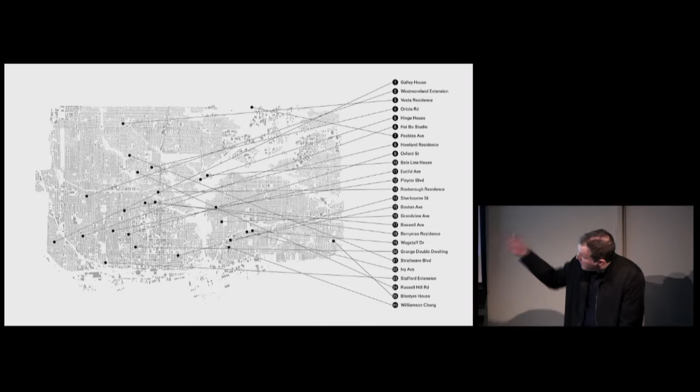Normally we would talk about, even as a kind of new practice, our projects in the city and the role that they play in the city and the role that typology plays in that. But tonight is really about our practice. Of course, I'll be showing work based in Toronto, but it's really about Williamson Chong.

When thinking about our practice, it is impossible not to note those individuals who produce much of the work that comes out of our office. Left to right, we have Eric C., Paul Harrison, Betsy, and myself, Dimitra Papantonis, Chris Routley, and that's Don on the right side. So we are a small practice, a small and productive practice.

I should note that even when I say we're a small practice and that we are emerging, I struggled a bit tonight putting the slides together and thinking about some of the cross relationships between the work, and I ultimately decided that I'm going to present the work at scale, essentially from small to big. For us, big is relative, but there is a future where things will be big.

I'll make some connections between this work, but do understand that as I'm presenting it, it really is moving from the small to the not so small. Most recently, we had an exhibition at the Corking Gallery, and it was the result of about 2 years of travel and research that was funded by the Canada Council for the Professional Prix de Rome.

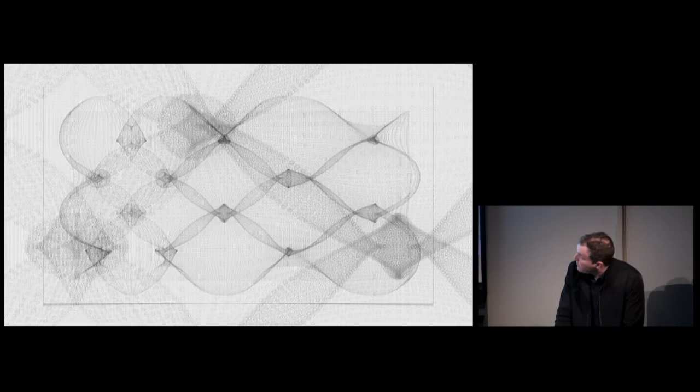In this case, when you see a light circle through this field, somewhere up here is a corresponding dark circle that one could imagine is the bottom of a tree trunk and the top of a tree trunk somewhere up in this field. In each of these images, there is an underlying and sometimes fairly complicated surface, but that surface begins to register the effects of eccentricity alone.

There were a handful of these images generated. Things like this, in terms of this kind of generative mode of thinking, there were about 3 million circles in a drawing like this. It does speak to a greater relationship within the field.

This is actually one of the more recent pieces that we've done. Right with our merger, we were asked to participate in an exhibition at the Workspace Gallery, run by Larry Richards, focused on Chinese embroidery. What's very interesting about this type of embroidery is that it's tremendously sophisticated irrespective of its pictorial representation.

There is a mode of this embroidery where the more sophisticated models represent an image on one side and a secondary image on the back side. The more sophisticated versions don't work from a base template; they're something more like drawing rather than working from a base image.

Looking to exploit this notion of the pictorial, but with an emphasis upon the methodology, the depth of movement of a needle through a screen, we looked at a series of images and applied sometimes a loose logic, sometimes a tighter logic to the extraction of certain elements, let's say RGB values from the image, to create a field. This field condition produces a sense of connectivity, which creates a kind of thickened condition, and this thickened condition early on was something we were interested in.

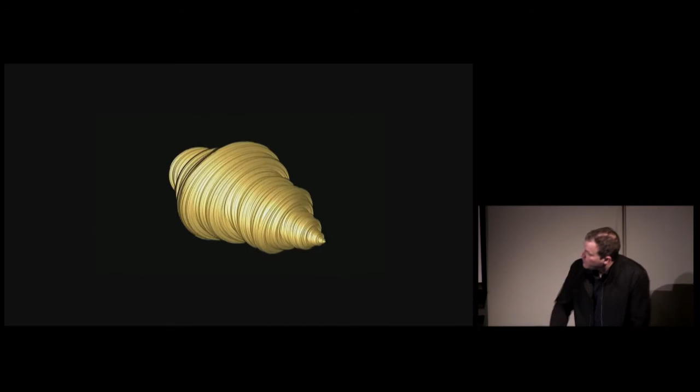What's interesting about this is that we're seeing a ray-traced iteration of geometry. So every instance we're seeing, like this image, doesn't know much about the three-dimensionality of the object other than the image that it's representing.

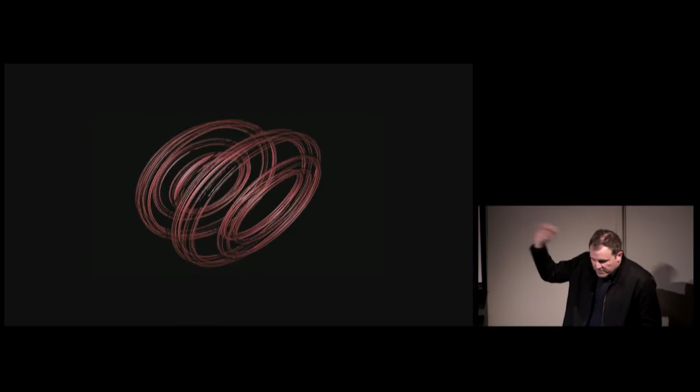What's novel about this approach—and this work was actually done with Alton Byrne, who of course is teaching with us now, was in the office, and this is an aspect of work which we collaborated with Alton—is taking this notion of ray tracing and capturing an image, we were able to take multiple views.

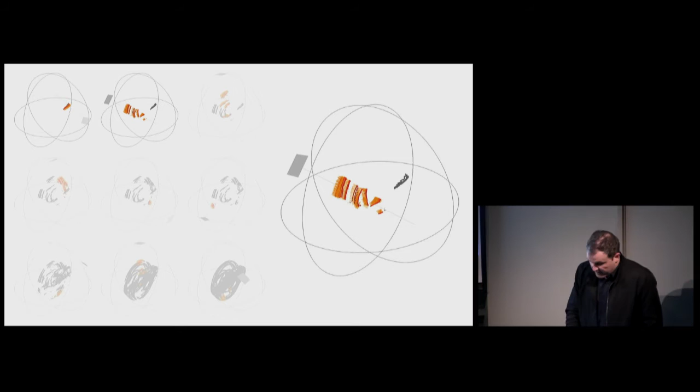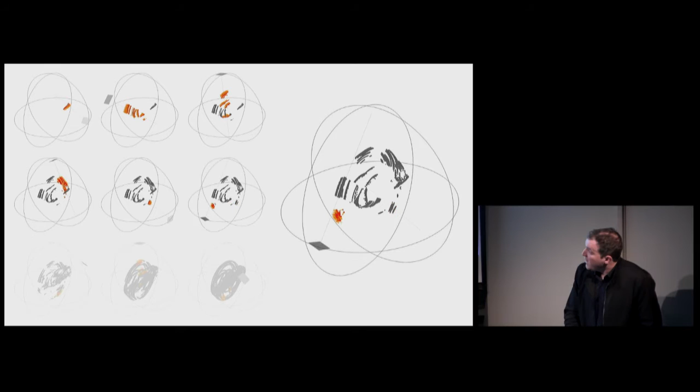The gray square that you see here is the orientation of a single view, and through hundreds of these views, capturing points, essentially the static, two-dimensional image that we associate from ray tracing. Each of these iterations begins to capture a number of points.

These resulted in text files that were gigabytes in size, and produced rather wonderful images of their kind of point cloud configurations. It wasn't so much that we were reacting or changing the geometry of the quaternion Julia fractal, but that we were looking at producing these three-dimensional artifacts, which were quite novel at the time, because again, these things are often only visualized through view-specific modes and ray tracing.

Along with this exhibition, and something that is impossible to show on screen, was a holographic representation of this as well, and the whole language of this was one based on two-dimensional and three-dimensional constructs for the exhibition itself.

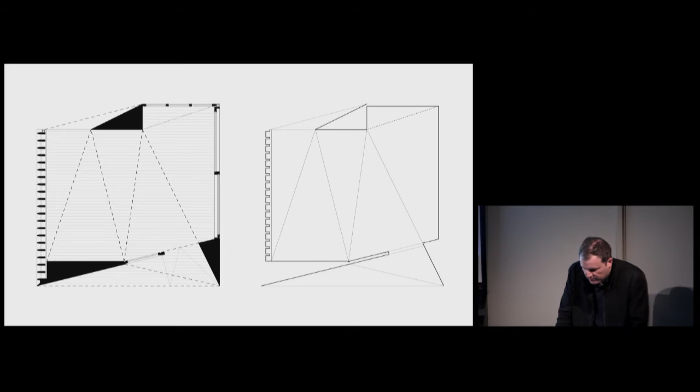Now, as a practice, we separately participated in the interior design show for a number of years, and there's a lot of sweat equity involved in these booths. We did several of the idea spaces separately, as Betsy and I and Don had each done one as well.

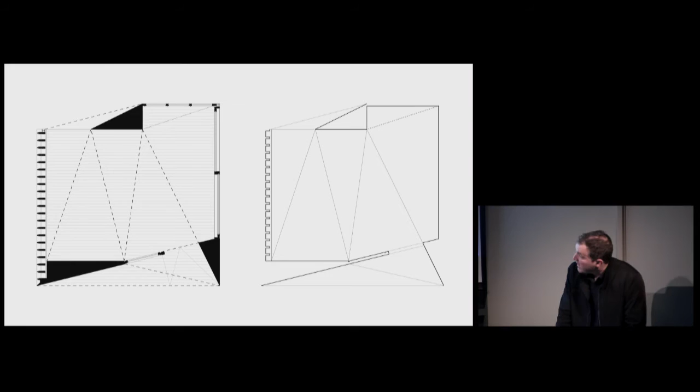We were asked, again early on after our merger, to produce a booth for a line of windows for a window manufacturer. Typically as architects we'd ask, what's the largest size windows you can produce? They supplied those windows, and the geometry of this installation is really the net result of reconciling between all of the maximum geometries of the window systems available from the manufacturer.

So we see a number of views, and you can see the tessellated geometry that results from the varying systems that comprise the envelope.

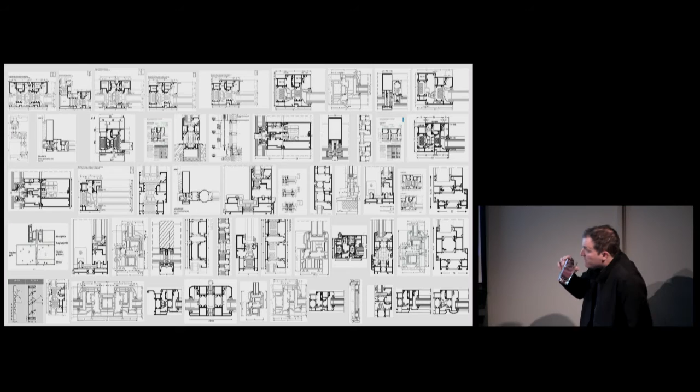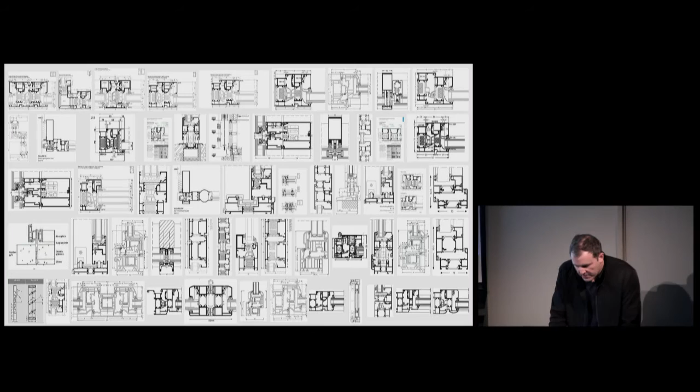Now, in considering things like windows, you're equally invested in the notion of window profiles, and we knew we wanted a smaller installation within the space itself. This is a fairly random set of images, but there was a notion that we would produce a piece that might hang on the wall within the space—an idea of a bear rug that we could make at the time.

What was curious about this was thinking about the hybridization between something like a bear rug and, thinking about the window profiles, investigating something like one of Rorschach's ink blot tests. This notion of psychological profiling, the window profiles, and potentially this idea of the Canadian notion of the bear rug hanging on the wall. If you're not familiar, this was fairly controversial when these ten slides were released, because they're the base slides for the Rorschach tests.

And one of these—I don't believe the one that I selected—deems your compatibility with your mate.

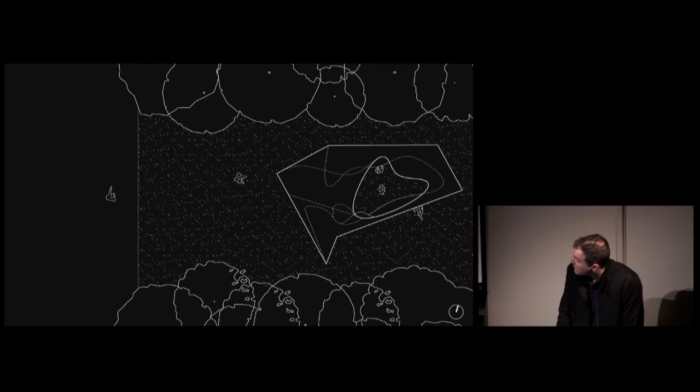The idea for this grotto was that it would produce a space of respite, so we see a view from above and then a view from below, located within a fairly defined parcel of land, populated with a variety of species of moss. On the interior of this geometry, as it relates to the curvature—this is a kind of cut and splayed version of the geometry—the moss would be deployed based on certain light amenities within the space.

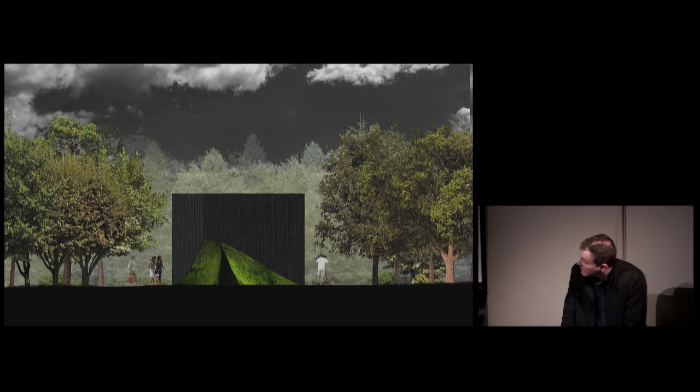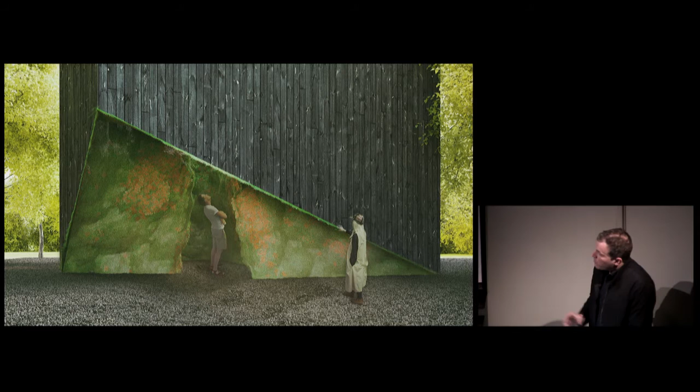So here we see that, in the notion of the grotto within an Italian garden, in front of the artifice of stone, we find a very soft and supple surface within this polygonal box with a view to the top. There's this juxtaposition of the charred wood—essentially the death of cedar, in a way—and the growth of the moss on the interior. And we see the threshold entry into this piece.

Working forward in scale, I'm going to present a typology which we have been interested in for a long time, the dog trot, and I'll show some images of this shortly.

We took an opportunity to participate in a competition in Cape Cod for which we were finalists, giving us a chance to stay within some of the modern houses being renovated. This is the Kugelgips house, and our daughter Ellery looking particularly uninterested in being at this house right now, but I think she did enjoy the trip.

The context of this competition was to produce accessory buildings for people who lived in Cape Cod. The role of these dwellings could be to provide housing for temporary workers, a very seasonal workforce in Cape Cod, but it could also address empty nesters who could move out of their larger houses to live in these accessory buildings and rent out their houses for more income.

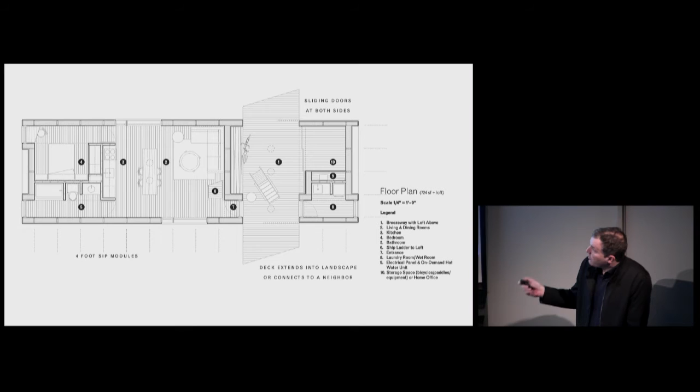We can see the pronounced open breezeway here. One significant thing about this plan is that it sought to use SIP technologies for easy deployment, with an overriding interest in affordability for this accessory housing.

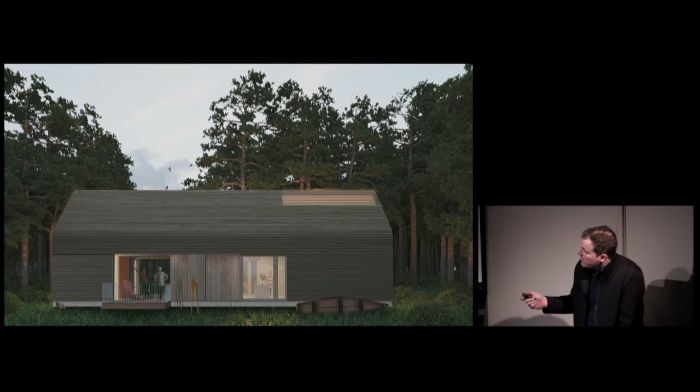Here's a rendering showing the engagement on one of the sites—this is a site for the single deployment of the dog trot. We can see the possibility of a panel that is able to close down the space for greater privacy. The whole system, though not necessarily reflected here since it's clad after the panels go up, is really quite efficient.

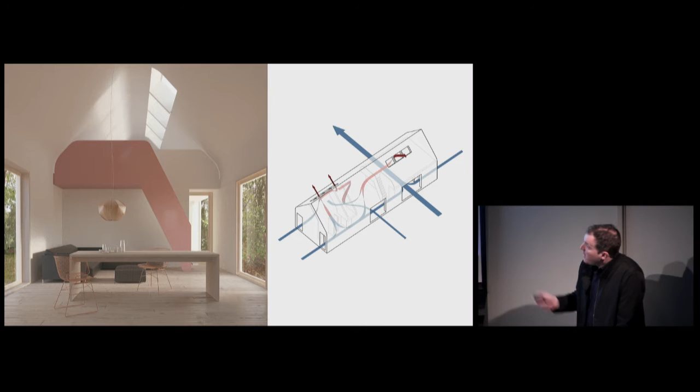In terms of passive strategies, it's really quite strong in the dog trot because of the main breezeway that pulls through. But we are occupying the upper space—in this case, a space that can be for a bedroom or a workspace. There are a number of operable skylights that can pull air through.

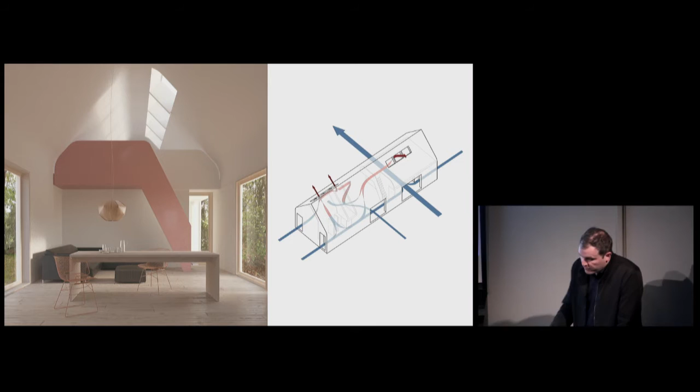So in this case, the proposal operates very closely to an existing typology, and it became very interesting to us with this idea of a variety of scale change, seeing these dog trots set up linear, where the breezeway itself becomes the connective tissue between them—you can see this more clearly in this rendering. This site was truly unspectacular.

So we were looking to create a fairly insular condition and a relationship between these fairly easily deployed houses.

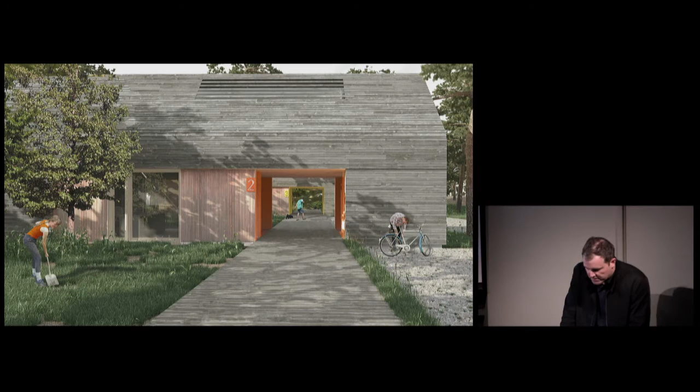One of the projects we have in the office now seeks to play on the notion of the dog trot typology while being a bit more responsive to the idea of landscape. In this case, it's a very direct relationship to the existing contours on a site and the overriding programmatic sensibilities of the client.

In this case, although it's very difficult to read on the screen, you should note that the master suite is on the left-hand side and all of the kids are on the right-hand side for reasons of privacy. There's this idea of taking this linear program and adapting it to the fairly extraordinary topography of this site.

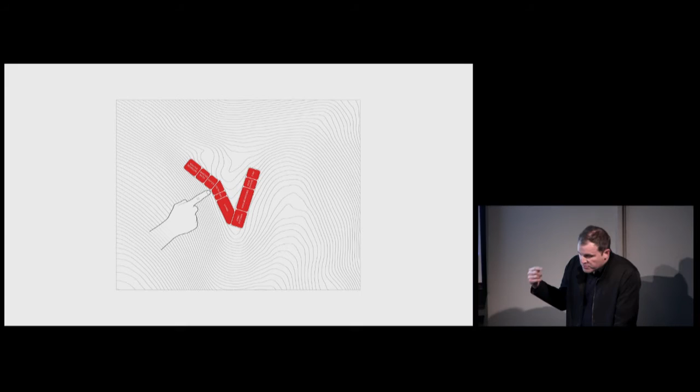Addressing some of the subtle manipulations, and in doing so, allowing a bit of the geometry of a pitched roof typology to play and create a crenellated surface on the outside of the building.

And so we see this is really operating as a guest house on this site. We see the net result of this permutation with the two bars. Now, of course, the left-hand side and the right-hand side are close together, closer than they were in a line. But it's this merger of the two points which produces, in fact, the kitchen and living room right here, and there's a view through this part.

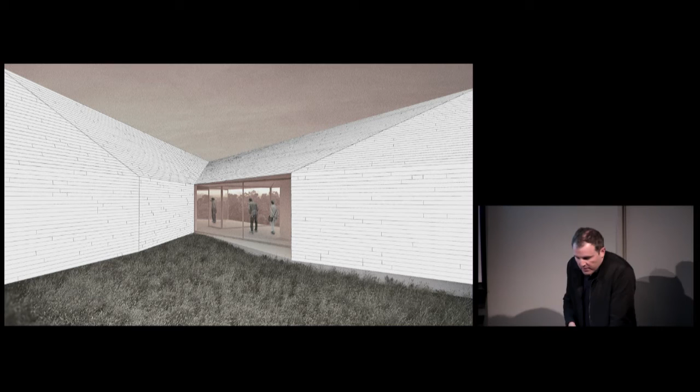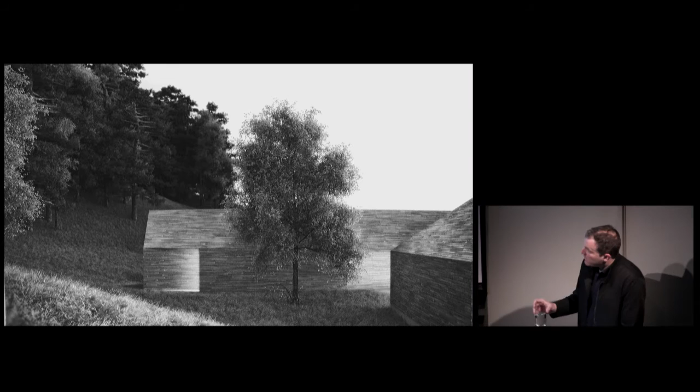We'll see in plan, this is the kitchen and a bit of an outdoor deck. This becomes the more meaningful image with respect to the dog trot typology, where we see a single, not an open breezeway, but a single point of view through an opaque side of the house, which is meant to maintain some privacy for the entry.

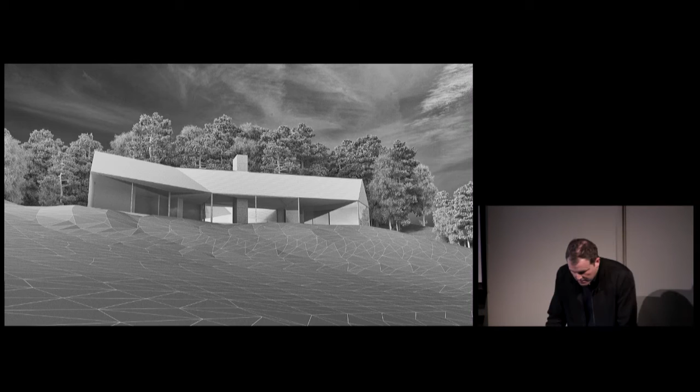But this is located up in the Collingwood area, and the clients were avid cyclists. They have a very intimate relationship with the landscape, and they also had a desire to avoid the view of a neighboring condition. There's a house adjacent on this very big lot that they would rather not see from their new house. And so they had asked us to seek opportunities to engage the building into the landscape.

And so this is perhaps one of the very first schematic renderings that we had proposed to them with respect to this engagement. There's this idea that there would be a lower level which have a view out to the landscape to the right, and that there would be a land bridge of sorts which would connect to a family room and bedrooms on the second level.

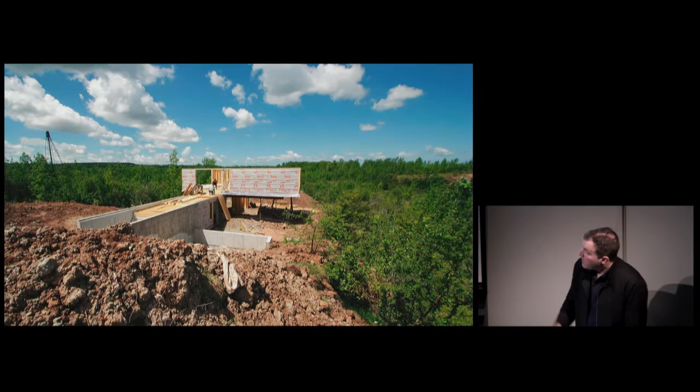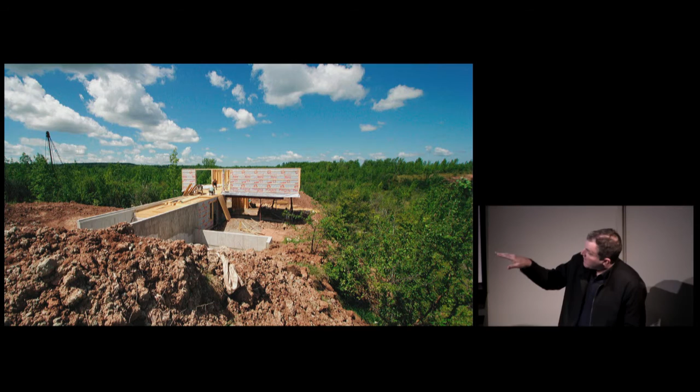And what's surprising from that image is how close over time it remained, even as the project developed. And we see from this side, of course, the engagement from above, and that is more the private side of the house with a view, but the entry condition has this fairly muscular tectonic of this cantilevered concrete wall coming out of a landscape that is largely opaque. There's only a single window for a bedroom on the second floor, but this was meant to provide them a tremendous amount of privacy and protect the room that is beyond.

Essentially, this is the kind of all-purpose room, dining room, living room. It's a very small house with a view from the kitchen looking out to the landscape. And so in the finished iteration, there's this really wonderful relationship that the building has to the landscape that in fact somehow feels very natural right now.

But truthfully, this idea of integrating a building into a landscape has immediate consequences during construction. So we had a very cavalier contractor. One looks and you'll note the absence of shoring on the deep rear side of this. But it's jarring at first when one starts building, unlike the abstraction that we might have in academia when we speak of integration in landscape, when the reality of integration begins with something like this.

And in this case, there was a fairly modest budget, so the way in which we employed details had to be very strategic. And so we're seeing here concrete formwork, the formwork of which is very standard residential formwork, and then there's only moments where there's board form lining the interior of this residential formwork, which is meant to—and you'll see in the subsequent image, you can now see over here the landscape coming down off of that wall—and this boardwork produces a kind of matching pattern to the cedar and the transition to this edge to the back patio.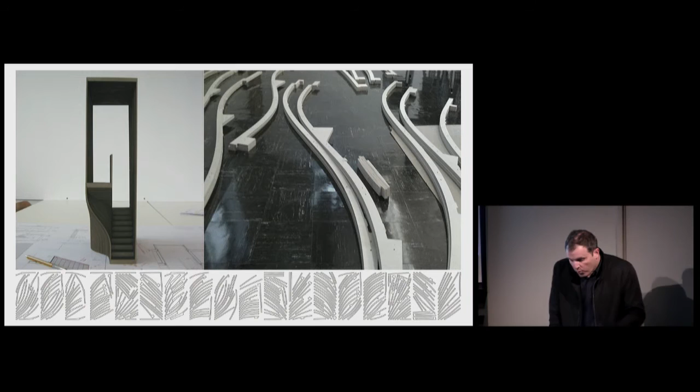The siding was one opportunity in this project, and the other was a stair. The stair operated under the simple premise of cut profiles that encase the underside of a simple switchback stair. This marks an interest we have in deploying such technologies at moments of threshold or points of engagement—the points on projects that we see and touch. This is happening at the entry to the house, and it's something we fabricated and installed ourselves.

It also marks an interest that within much of our work there is a certain restraint in the overall reading of a project, paired with a potentially more exuberant geometric exercise within. There were other moments where we took opportunities within the house to look at the supply conditions for air within the systems.

Whereas that was one of our early projects, a project we're working on now, partially under construction and to be completed once the snow melts, is a project up in Fox Lake. This project looks at the typology of the Korean Hanok. One thing about the Hanok is that in some of its iterations it has a mountain on one side, a river on another, with a north-south orientation—and we're privileged to have that same orientation on our site.

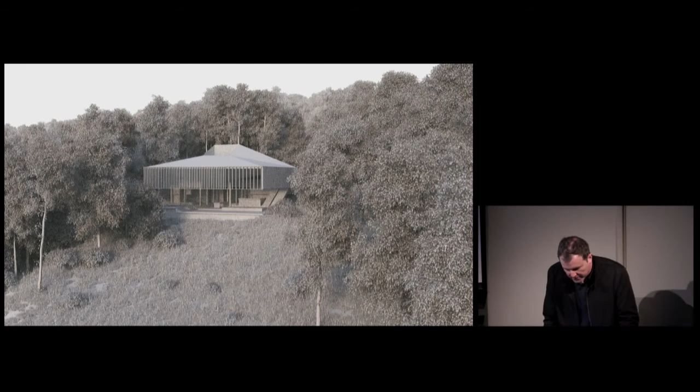In this project, as Richard mentioned, we were fortunate to receive a Canadian Architect Award this year for the house. It's really an extraordinary site that allows us a sectional engagement relating to the inclined topography.

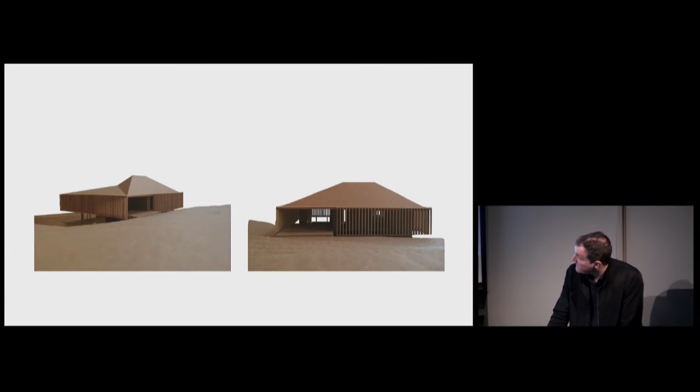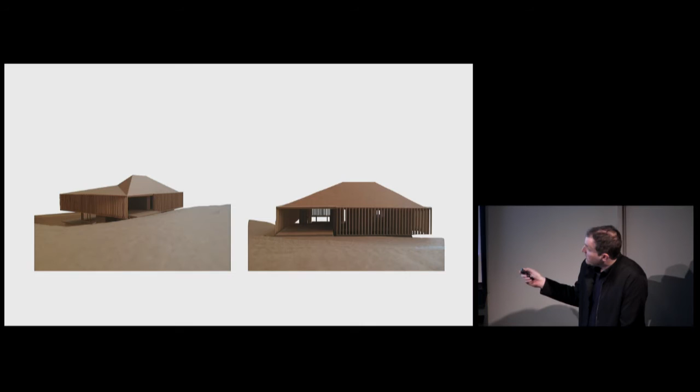Rather than having the inverted roof within, we now see this roof having a more normative pitch in some regard, while feeding the sense of an interior courtyard within the space itself. These are rather crude model photographs, but they show the entry condition from above, which is a very different reading from this side. Essentially we enter in this corner and then descend into the main spaces within the house, with this upper tier—this L-shaped part of the plan—being a master suite.

So this is the upper floor and the entry condition here. This is the master suite.

There's a descension down into the main space here with an opening view to the landscape and this kind of flanking. And then in some regards, there certainly wasn't...

A desire to have an open air courtyard. So in fact, there was a lot of adaptation, but there's a sunken moment within the space with the dining area, which is the receiving portion of the light of the skylight above.

We see a rendering of one of the iterations of the scheme, and a second iteration.

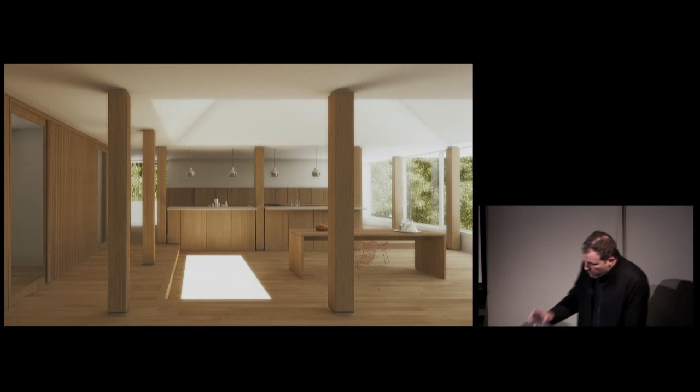Now, there was the house in Frog's Hollow, which for our practice is fairly iconic, and then there is the Galley House. The Galley House was Don's first project, and it marks our move in some ways, and the move in this talk back to the city.

And what's curious about this is that in today's market, someone will look at this house and see tremendous value, a lot of money if someone would pay for this house.

Not so long ago, this was very much a problem. A house like this, for example, for new construction, you have to deal with setbacks. And there was something very radical about this proposition.

And of course, as I'm presenting this, every time I talk about this project, I just imagine Don thinking all the different things he would say about the project, by the way. It's hard for me to kind of get through this, but I'm going to give my own reading of it.

What's extraordinary about this is that the removal of the existing house produces then this new house, which is less than 12 feet wide, and has a kind of extraordinary frontal condition of transparency.

A transparency, of course, which would be that a client would have to be quite amenable to in terms of the openness to the street. But this openness to the street is the thing that I absolutely love about this house, because in fact it's the investment of kind of receding the skylights in the space that produces a backlight condition for the glass.

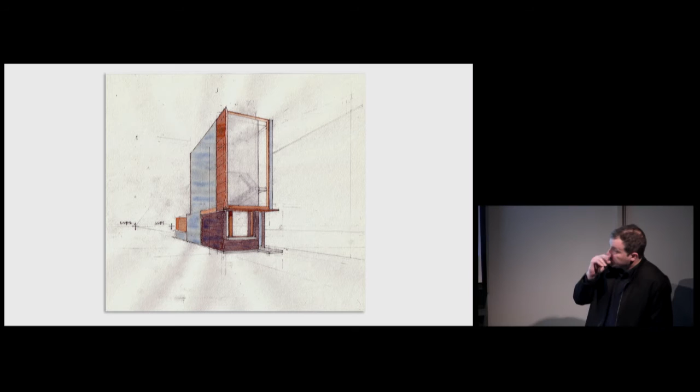Don can draw very well. This is... we are curiously of a bridging generation, I think, Betsy and Don and I, in which we were trained by hand and used computers, which is kind of good because as the partners in a practice, we're not divorced from the tools of which our fabulous employees are slaving away at every day.

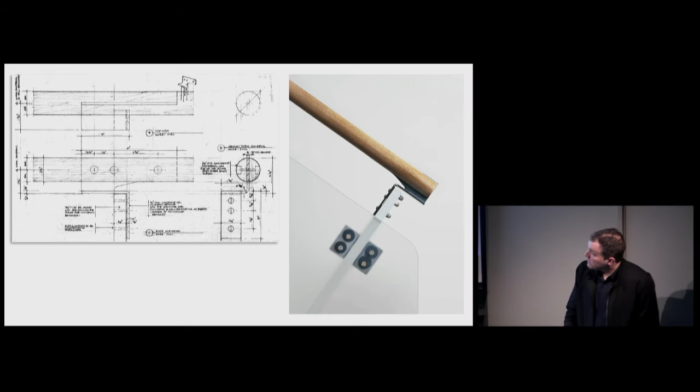And then, the notion of thresholds and handrails in the house, I think, are quite extraordinary. And then the notion of livability.

There's a double height. Interestingly enough, this house is located on a street called Galley Street. It has a galley kitchen, but its title is not related to this. But a very livable space, and a space that...

Established tremendous traction for our practice and for other projects. So as an example, there's this notion that with the galley site, it was an existing narrow condition.

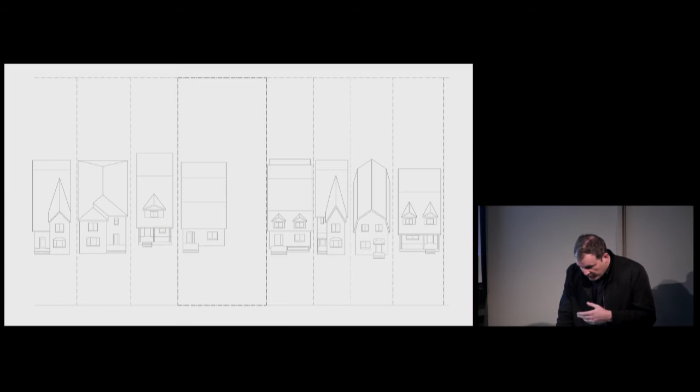So now we see another house, in fact, which has an unusually wide lot. And through some negotiations with the city, there's this idea of splitting the lot, selling the existing house to help fund this house.

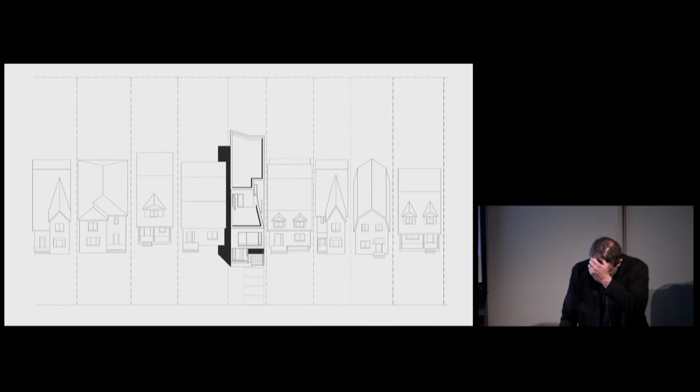And it's curious here because we're manufacturing our own density and a certain belief, and in dealing with this narrow condition, there are a lot of incumbent issues, particularly the idea of getting light into the middle part, the middle aspect of the program, which is a challenge within narrow lots.

And so we see the front elevation here, and I'm going to show a zoning image from the city. I'll make a comment back to this image when I show that image about the similarities.

I'll show you a couple of images, but this house is kind of dealing with a narrow lot, but it also is engaging, I'll say, a certain typology of us having certain walk-up conditions where, in fact, we're not looking to program a house with all of the broader programs, the living room, dining room, and kitchen on the same floor.

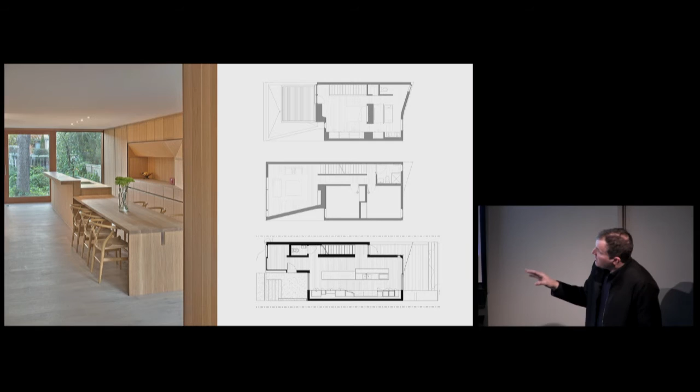So in this case, the owners were very amenable to a notion of dedicating the entire ground floor to the kitchen. And so it produced this kind of extraordinary through condition within the house that admittedly has an austere presence in that most everything that can be hidden is hidden.

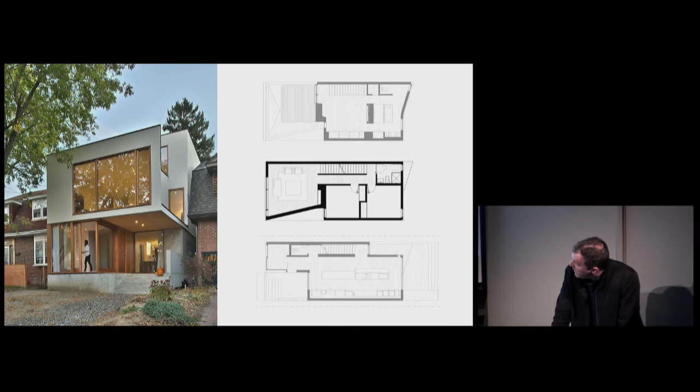And this in some ways kind of forces the aspect that there's a living room on the second floor, which we see here in plan. But the view on the left, what's interesting for us here is that there's this knife edge condition here.

There's a structural moment where this is in tension, getting pulled back for this cantilever to occur. But this knife edge on the front is carving back, here we see it in plan, to provide light to this inboard bedroom. So even with this very small move on the front, it's addressing some of the base challenges within the narrow lot typology in Toronto.

So this is the rear elevation. Don does not like this image, but it's really a wonderful image where we see that the house was pushed forward out of respect for maintaining this tree in the backyard. But in the master suite at the top, there is this recognition of the receiving geometry of the tree, and this view of the window from the bathroom on top.

And we see on the top floor of a house like this a much more modest deployment of detail, something quite simple, where we have trim and things like this. It's very different than the dedicated millwork that we find on the second floor, or on the first floor in the kitchen. So with this walk-up, this notion of the walk-up typology...

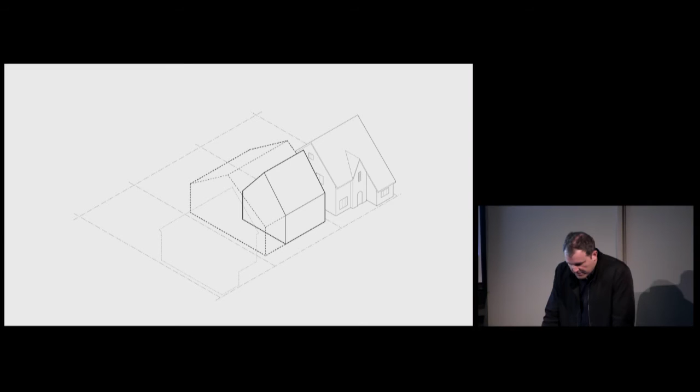This is another project that we have in the office, in Forest Hill in fact, and it's very onerous. Basically they've established the zoning bylaws where one has to go to committee of adjustment to build a house of even modest size, and I think a lot of it has to do with trying to avoid building much larger houses. There are a lot of lawyers that live in Forest Hill as well, so there's a lot of resistance to things like this.

So this client did not want to go to committee of adjustment, but he had a very strong notion of the size of program that he needed, which far exceeded what could normally be built. So this is sort of what can be built in some ways, and that's what he wanted.

At this time, this is what I was referring to in the Blantyre case - the city's existing zoning bylaw, which has its own reasons, with what's called the main wall prior to the pitch, has a much lower maximum height for flat roof buildings than for pitched roofs. And this by far is the norm within contemporary architecture in Toronto.

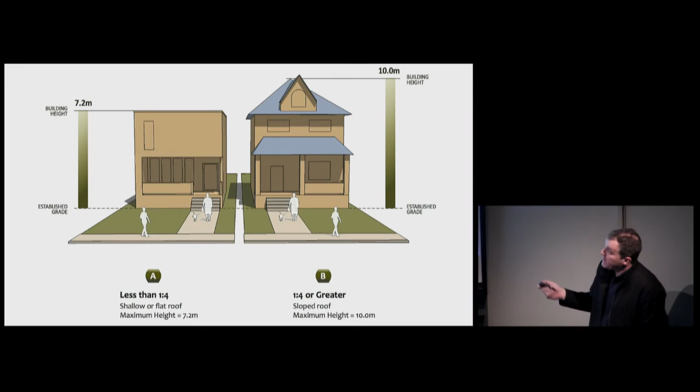It's as if some intern at the city opened up SketchUp and just did this, and that's it - that's modern architecture. But one thing that's key here is the 7.2 meters. On this site, for example, a flat roof thing could be this tall, a pitched roof could be this tall, and we're trying to stuff so much program into a site that was going to be very limiting without getting a variance for this.

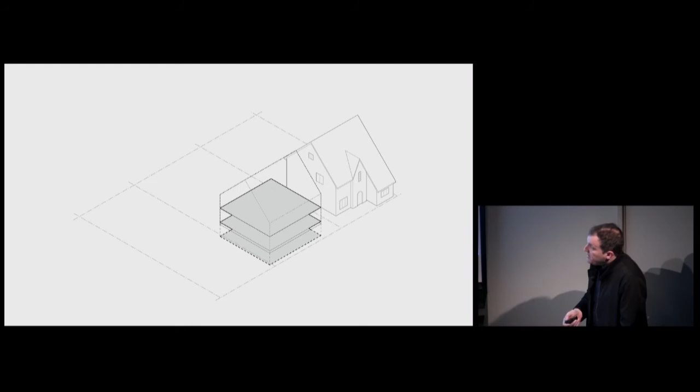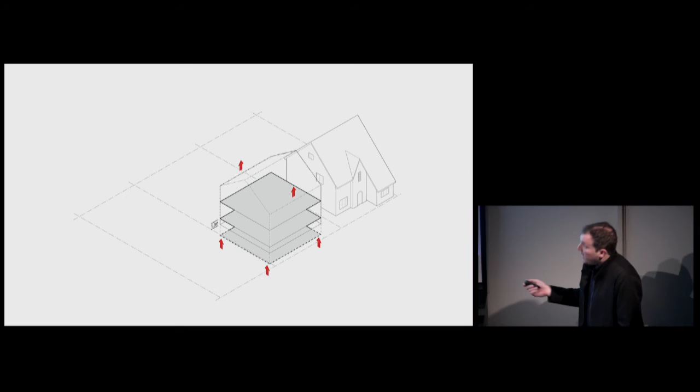So looking at a very straightforward condition of having two floors within the house, a very normative condition, the idea of using a basement, the floors below, for a lot of the program, and then embracing certain notions that operate within the zoning bylaws of the city. So we can move up the ground floor 1.3 meters, and then all the space below doesn't count against your GFA. And what does this provide us?

Well, even in considering this kind of shift, the one thing that we wanted to do in comparison to the existing houses in the neighborhood is to invert the program. So rather than, like in this house, having the living room, dining room, kitchen on the ground floor, and all of the bedrooms above, one of the struggles you have in doing that is that you're always looking to have those ground floor spaces have greater amenity in section.

So the challenge is trying to make those spaces grander, which kind of impinges upon the spaces above. These spaces above are often compartmentalized with walls. What was interesting for us was the possibility of pushing all of that program, the kitchen, the living room, the dining room, to the top of the house, and having the bedrooms on the floors below.

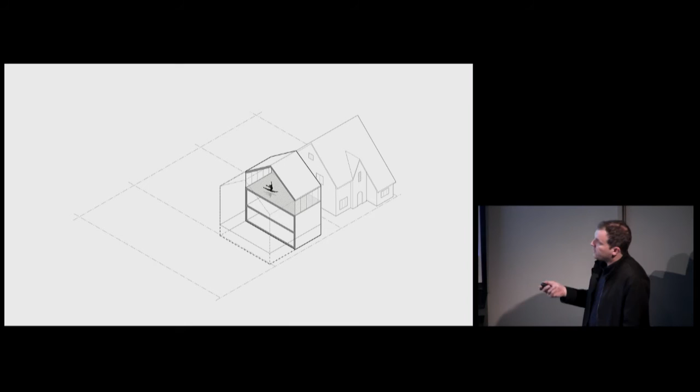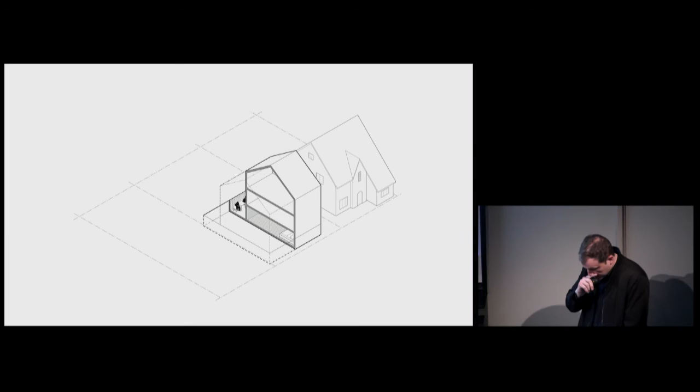So we see in this diagram, for example, the top floor is exuberant. You can dance, you can work below, and you live. There's a very significant thing happening at this level where you see a bump out for this sunken garden, and we see a bit more of a developed section.

This actually receives a part of this in terms of working the GFAs. It receives a garage. This garage is particularly tall because it has a mechanism to stack cars within it.

So the house gets jam-packed with this program, but the most significant thing about it, in fact, is that the resulting elevation focuses at this upper level, which is here without the roof, where we see this very open space.

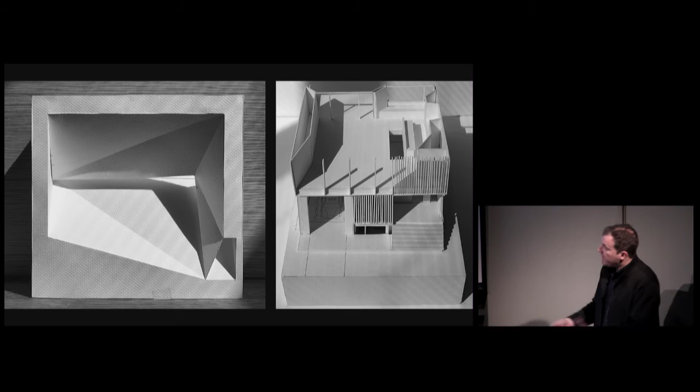And this open space can now receive all of the geometry afforded by the pitched roof. So we're reclaiming the attic space into one big space, and we see the top of the model flipped upside down.

And I should note, coming back to this, that zoning permitted us about 1,800 square feet, and we have about 4,000 without, as of right, in this proposal right now.

A very new thing in the office, of which we have at least 3 projects now, is looking at the notion of multi-generational living. I imagine this is happening with a lot of architects in the city.

It presents a unique challenge for a number of reasons. Often limited budgets can be very difficult, respective of all the amenities required for parents and various generations of families to live under one roof.

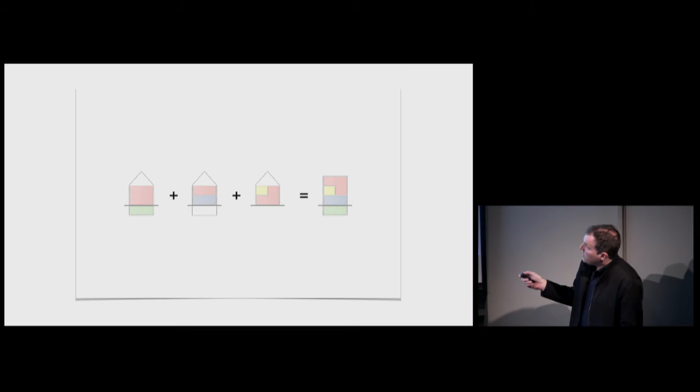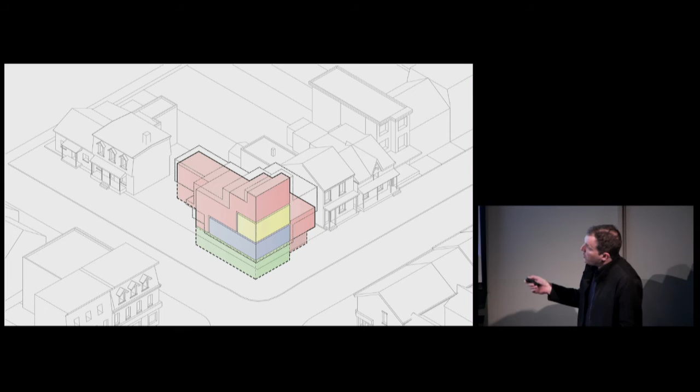And this would be the proposition for this housing type. So now we see in a bit more detail our 2 apartments below, and now we see this pink program wrapping around the yellow. This ended up changing when they actually occupied the house, but I'll speak about that in a second.

The house, and this is actually on Huron Street, just south of us right now. This is wrapping up slowly. The house itself has a very clear section respective of passive energy performance.

There is a direct stair within the main unit that feeds into an operable skylight above. And this operable skylight is significant in that, of course, it promotes pulling air through the house. But it also acts like this kind of bump up right now.

Of course, this isn't occupiable, but it looks to hold the corner for the site and maintain similar heights to the existing fabric. I'm saying that because in the hands of a developer, this site would have seen much greater density.

If you had seen this house prior to it starting, there was that image of the house in the corner. For years, someone had spray painted on the side of it: 'Build a condo here, please.' But the family that owns this site didn't have an interest in developing it that way. It was a very personal interest for them. They were interested in the income it could bring in.

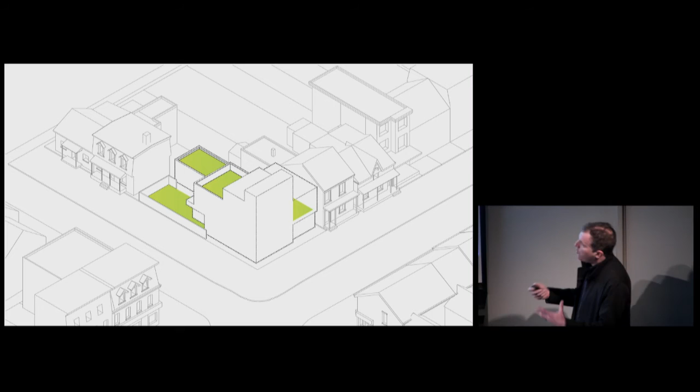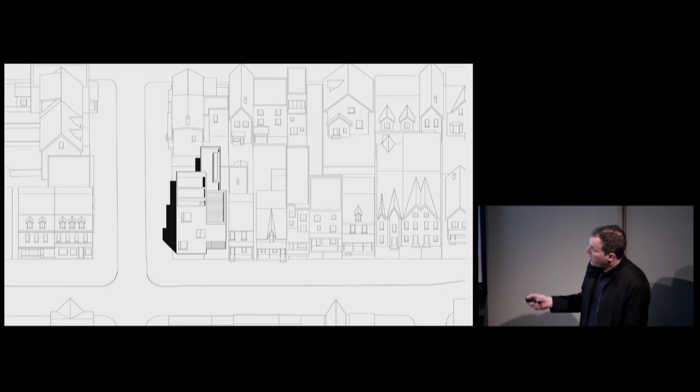So the project acts something like a blowfish. It makes itself much bigger and occupies a lot more of the site than it actually is, in fact under 3,000 square feet. Part of that is there's a garage below, and then there's this exterior courtyard, which from the outside one wouldn't know is a courtyard, but this kind of helps maintain and stick the density in the site.

So we see now that what's happening in the composition here is that there are fairly large windows, respective of program. So this is a window for the apartment below, a very large window for the parents' unit. And then there's something very curious here in the master bedroom—this window is lifted up. I have another image of this; this is an early rendering for the house itself.

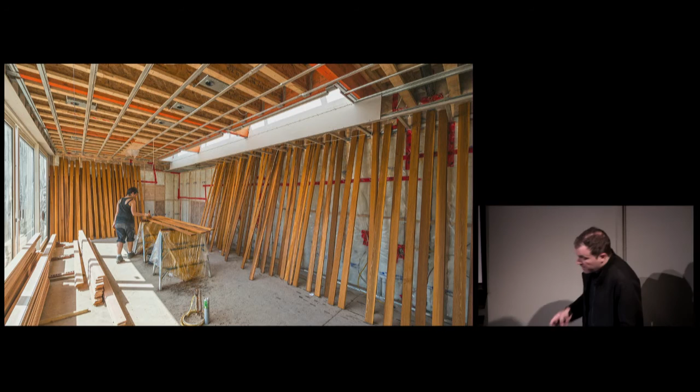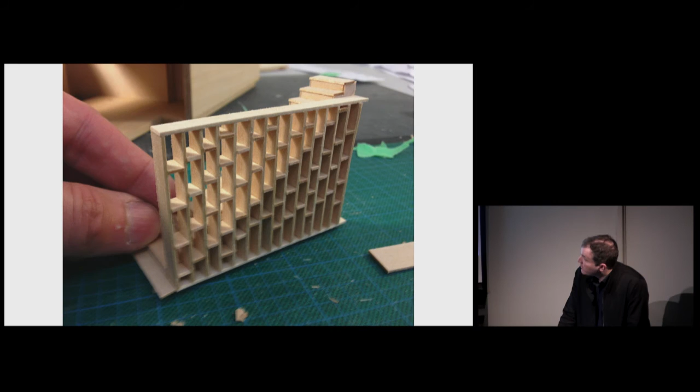The house is in construction. We actually don't have this project properly photographed yet, but that'll be happening this spring. There's a wonderful stair—this is a kind of miniature model of it that's integrated within. We'll have wonderful photos of the stair, which is built, and which is really, given the fairly limited budget for the project, one of our moments to explore an interesting moment of millwork within the project.

And I'm mentioning that, in fact, we had to make—already within this house—these big moves on the outside looking to make the house hold the corner better. There's already another house under construction next to it, which creates a certain responsibility to the urban fabric, to maintaining a corner.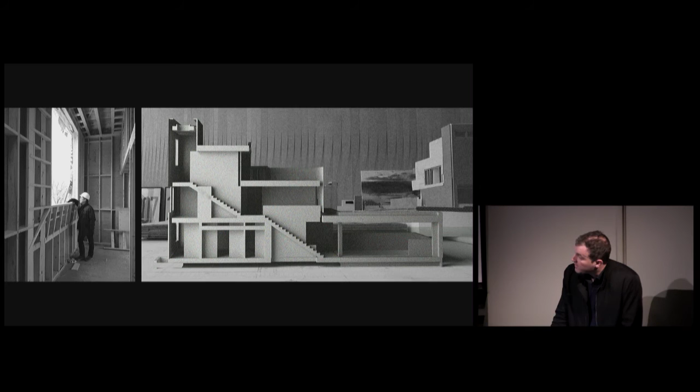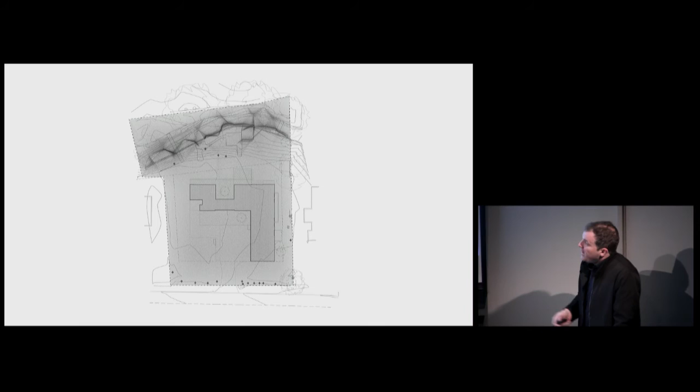So on the multi-generational front, we have another house outside of the city, and this house is very much under construction right now. The curious thing about this is that it's a huge site—the garage is a 3-car garage, which is bigger than some of the houses we currently have in the city. So it's not that we aren't excited about the project, but the formal possibilities on this kind of larger site were really exciting.

But there's something very significant: there's a beautiful creek on the back of the site. And it turned out through discussions with the clients that basically they wanted every room to have a view of the creek. So very quickly the house became a very linear house with all the views toward one side, and we ended up with some very interesting restrictions.

With a formal access now, this kind of large L-shape is largely dealing with a garage for the site. The road, although it's a very beautiful site particularly on the rear, the front road has a lot of traffic, so there was this desire to maintain opacity and privacy from the front.

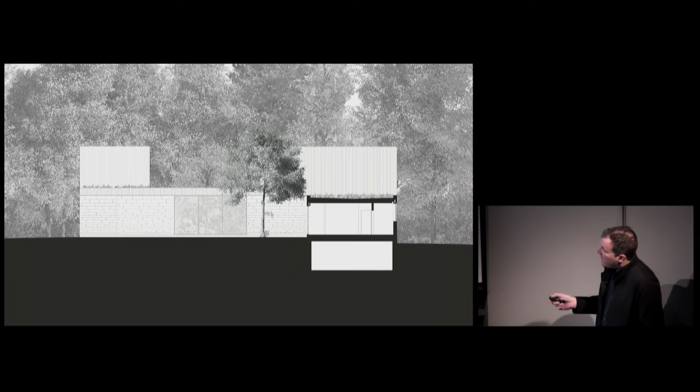We see then in a series of sections, this is a cut through beyond the garage, but looking through the front of the house, not dissimilar to the dog trot typology, not an open breezeway, but we have a single view through, and you'll see this is the dining room here.

There's one moment that we see through the house into a courtyard, a flanking courtyard, and to the trees below. This is a section moving deeper into the plan, this is the connection and the dining room area, and we can begin to see the degree of transparency and opening up through the house as we cut deeper.

There was a strong desire to have the kitchen be separate from the rest of the program for a sense of privacy and to prevent sound attenuation and things like this.

So we see that on one side, the reading of this section, the kitchen on one side, the living room here, and in plan I'll show in a second, this multi-generational component is in fact an entire unit for the parents.

One thing significant about this house is that in terms of their aging parents, there's a concern of accessibility, so the house is on the ground floor entirely at one level. There was one demand from the client too, that the bedroom had to be cantilevered. Deeper back into this section, this is the cantilever and the view out to this landscape.

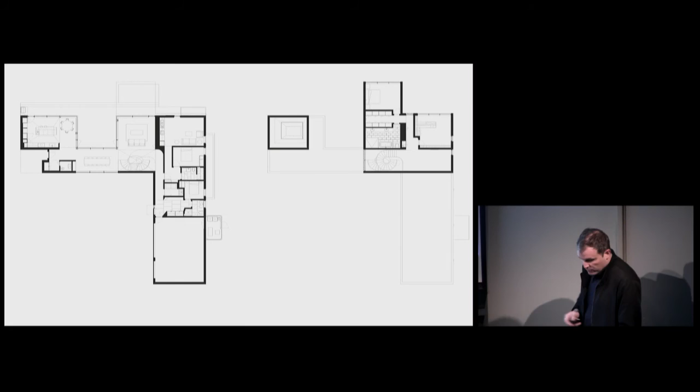And in plan, the dining room acts as a bridging component flanking this courtyard. The massing and extraordinary height of the kitchen becomes a kind of sculptural move for us in section, with the master bedroom and suite and a family room above. So the rear of the house, in fact, is quite open.

We see much more glazing on the rear, with the only exception being this double height space for the kitchen, which you'll see in one moment. So these are all developmental renderings.

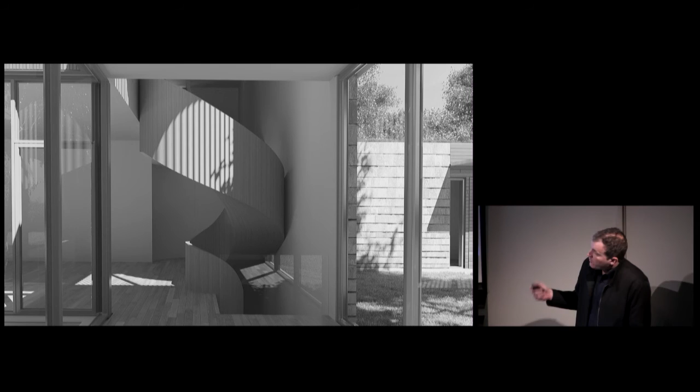I think what's interesting in perspective of the house in Frog's Hollow, I'm only showing this stair and that stair, is that the stairs have certainly become one of the very interesting opportunities for us to, in some ways, intervene within a project and look at explorations of geometry.

So I'm going to begin to wrap up here by discussing a change of scale for the office. I'm only going to show two projects, and I'm only going to show one image of this project. This was a recently completed proposal—not a proposal, but a cafe for Pilot Coffee Roasters.

It's not actually a cafe, this is a tasting space, I should note. This space, interesting enough, is on Wagstaff. I encourage everyone to visit this space—it's really lovely, and they make extraordinary coffee.

The bespoke industry for things like coffee is really exploding right now, and it's amazing how much interest this project has garnered for us. You'll be seeing quite simply more commercial spaces from us and master planning strategies associated with things like this.

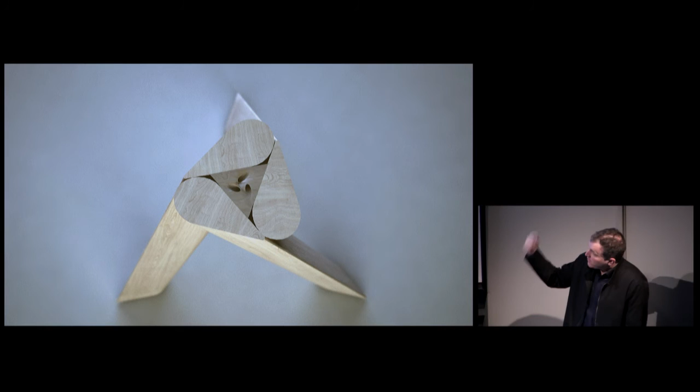In this case, these were meant to be not cafe tables, but tables for another purpose, that looks at a reciprocal structure within a self-similar profile for these wood profiles, and we see a view from this below.

Now, that kind of breaks the stride of the lecture perspective of moving up in scale, but it's just to show that we often look to deploy certain opportunities within projects.

The last project I'm going to show is a master plan we have in the office for Abbey Gardens. It's a fairly extraordinary community looking to cultivate their own lands, but also educate people in the modes of agricultural production for self-sustenance. The site is incredibly interesting because it's an abandoned quarry, so this notion of land reuse is really extraordinary.

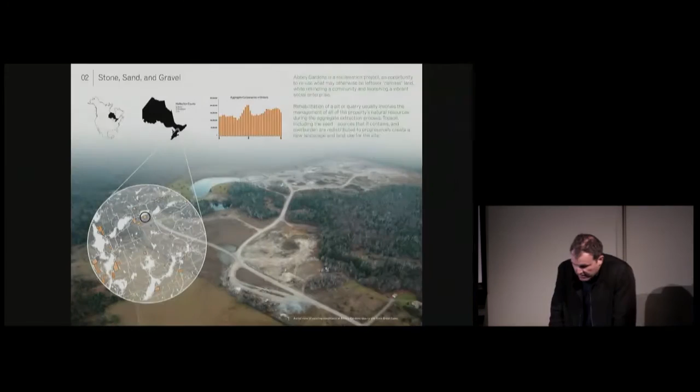We see in the initial master planning proposition that there are a series of buildings, and one that I'm going to focus on right now is this building which has the title of the Cradle.

This is occupying one of the main quarry pits, and we'll see it here on its own. This is the main building for the greenhouses, and it has a spire, this kind of food spire.

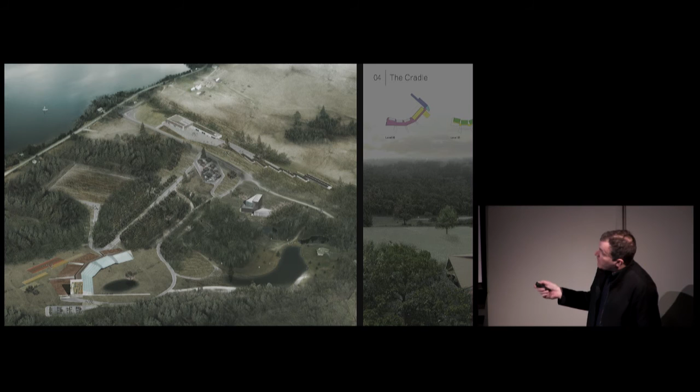This is the education node within the master plan. Within the spire is where classes are taught for growing food and for teaching about cooking. We see the greenhouses here in the master plan. There's a performance arts theater and a marketplace for the sale of produce.

But looking at the Cradle, we see this notion of deep integration into the landscape. Again, the green growing fields just sit on top in this section.

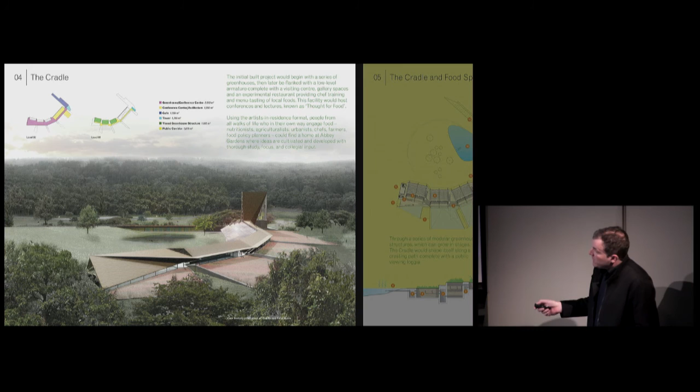I'm going to show another set in a moment, but it's a very smart section respective of a bit of a riparian landscape, passive strategies where air moves through the space and captures both heat and sun for growth in the greenhouses. This is the food spire itself, which in fact produces an extraordinary pull of air through the space.

This master plan has had us look at a number of things, particularly the growth schedules, the manner in which the building would be used over time.

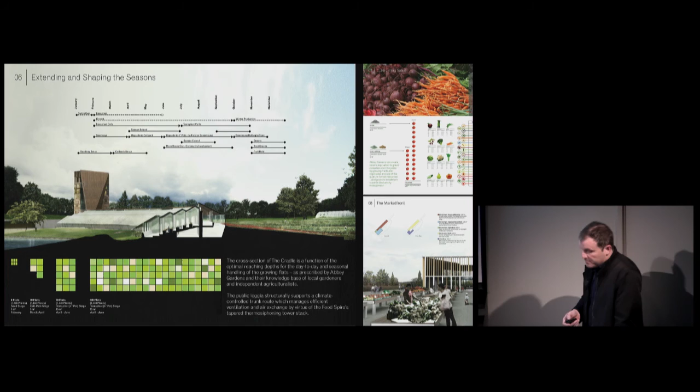And in some ways, it's a bit of a reach, but there's this notion of replacing the economy of the quarry with an economy of production of food.

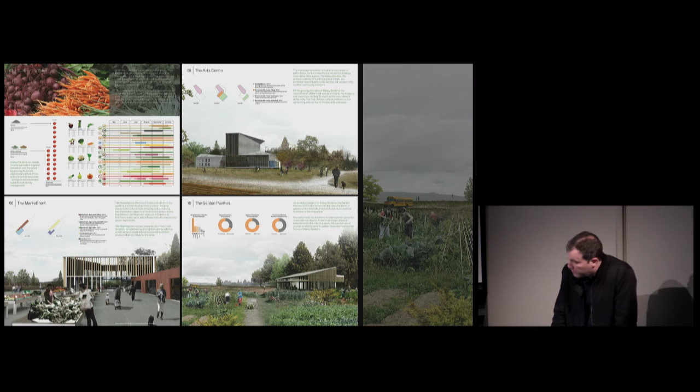So there's a bit of correlation respective of how robust the landscape can be once it is remediated to become both productive for the production of food and for the local economy. We see within this plan as well the marketplace for selling food, and this is the performance theater.

All these are kind of very schematic propositions. And this final thing is the entry building, the welcome center of sorts for this property, which is intentionally very, very open in plan.

That kind of becomes the symbol for the site, and I have a hard time looking at this because what they actually built on the site is not this at all. They built something else, and we're like, that is awful.

So we did this to show them what they could have. It's interesting that way sometimes with our clients - like, you should have asked us, and we could do something like this.

And so this is a bit of a painful image respective of what was built on the site. This is the last image.

I'm going to say that tonight, presenting the work here, it's been so long that it's very much a show and tell for me. And it can be difficult sometimes to position our work respective of common threads.

So maybe scale isn't the best way to discuss our work. It seemed appropriate tonight, but the one thing that is missing is that there's a tremendous amount of built work that I'm not showing, and I struggle with that too, because as a young practice, we're constantly having to prove ourselves. It's one thing about having a practice that we're capable of doing things, that we're capable of building, and in part showing the scale now.

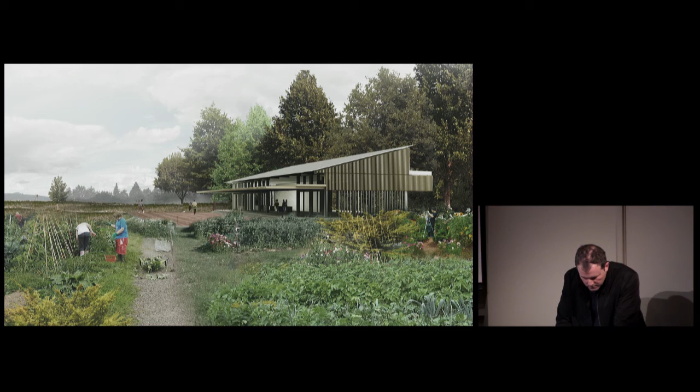I have a question about scaling, the problems and the challenges and complexities of scaling when you move from the small to the big, more in terms of the design geometry. I wonder if you could comment on how you decide and struggle with the evolution of scale against geometric complexity, and when certain geometries are not working at a larger scale, what are the different agendas or agencies that take place at a larger scale that are different from the smaller in your practice?

Scale is an interesting question. I'm going to answer your question directly in just a moment. But I'm first going to say that when I started teaching here, I very much represented new modes of fabrication and thinking about geometry, and I'm still very much invested in those ideas.

But I found that maybe the older I get, the more curmudgeonly I get, the more doubtful I become that we should be looking to mill a building, with everything being the singular process of something like this, right? And I say this, by the way, because there's Benjamin sitting right here who all he wants to do is 3D print a building, literally 3D print a building.

And I very much like the incumbent issues associated with limitations, in fact. And sometimes I find that the problems of what it takes to make a building largely get skirted with the notion of fabrication.

So having said that, around scale, often what you're seeing in our work is the scale of what we can afford, and it's not just a money issue, but the access to technology. So we, curiously enough, are an extremely skilled office, capable of operating at very different scales, but limited more by the budgets and scales of our work. So we reside in this kind of domain where I think we have far greater capabilities.